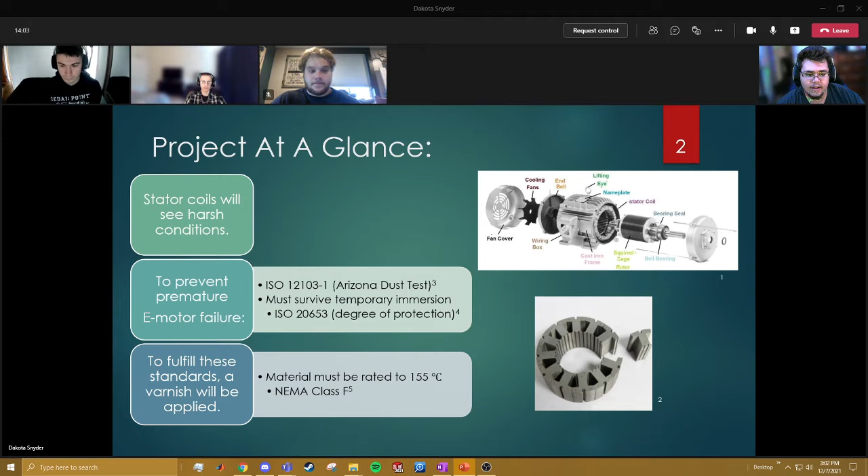to survive temporary immersion. To combat the resulting corrosion because of immersion, a varnish is applied to protect the inner diameter of the coil. This coating will also need to be able to withstand a temperature of 155 degrees Celsius. This project is a two-part project. First, we will need to assess different varnishes and test them for evaluation against specified standards.

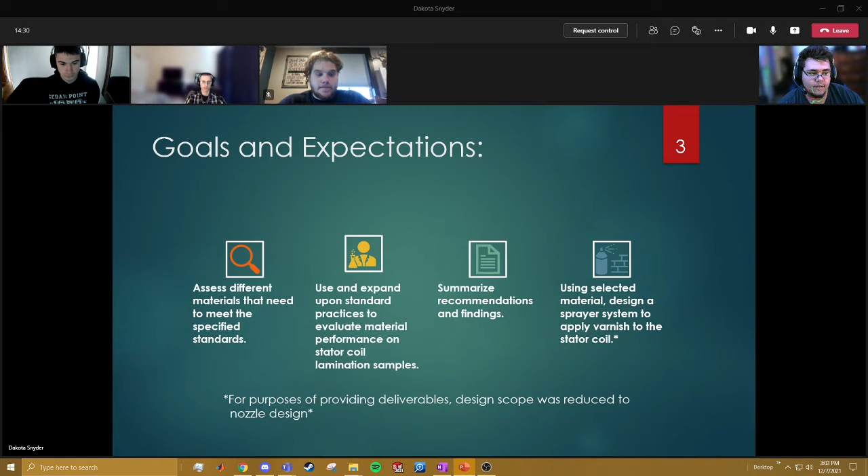After material testing and selection is complete, the team will move into a design phase. The second phase was intended to be used to design an entire manufacturing process to apply the varnish, but due to constraints on the project, the team decided to try and improve the nozzle design to better apply the varnish material.

The team chose 5 materials to analyze. MG Chemicals is the industry standard, but it is a brush-on application. 2 aerosol applied insulating varnishes comparable to MG Chemicals were selected: Seymour Tool Crib and Sprayon EL609. Anti-seize, an insulating varnish with an operating temp outside of the required temperature, was selected to see the effects. A silicone coating, which is not generally used for this application, but has extreme insulating properties, was selected to prove the efficacy of insulating varnishes.

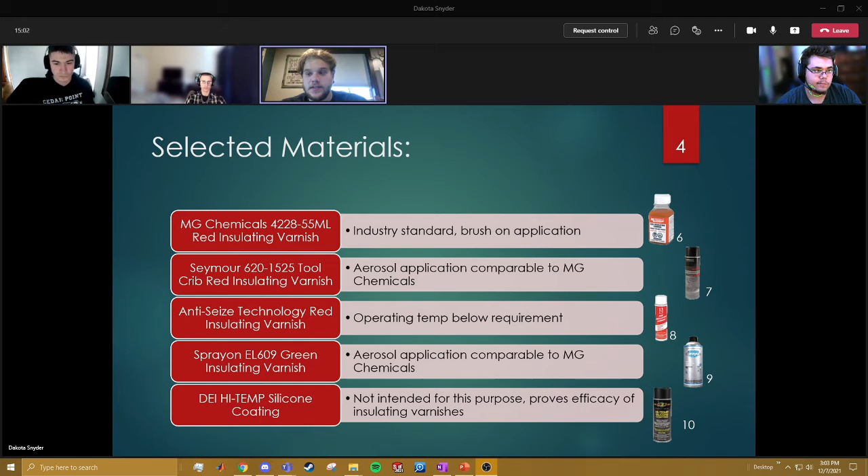The team sprayed e-steel coupon samples with each material. These samples were temporarily submerged in a 5% by weight saltwater solution, then baked at 140 C for 40 cycles at 10 minutes apiece. This saltwater test advances the rate of corrosion and allowed the team to analyze each coating's prevention capabilities. The knife test is an industry standard used to analyze coating adhesion performance. A knife cuts an X into the coating, and then the coating is pried upward using a known force. Strong adhesion is an indication of good coating performance and will help prevent corrosion.

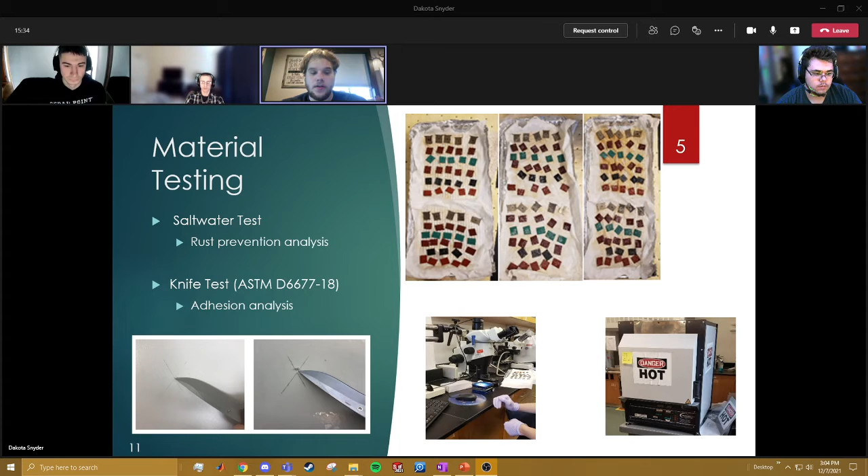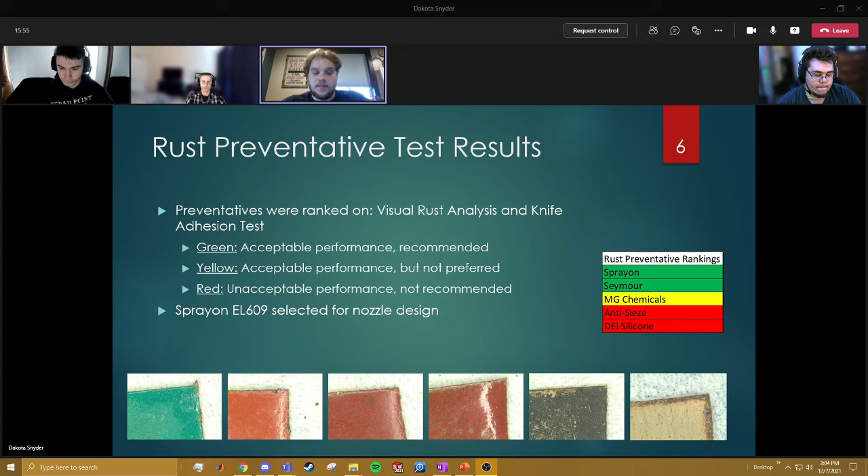The materials were ranked based on the results from a visual rust analysis under a stereoscope and the knife adhesion test. Sprayon and Seymour were the most resilient during the knife test and displayed the best relative rust prevention as well as coating uniformity. Anti-seize and DEI silicone performed the worst in both analyses, which was expected. The team decided to move forward with the Sprayon into the nozzle design.

The number one goal of designing nozzles was to produce an optimized uniform coating that would better suit Schaeffler's needs for the saltwater test. The nozzles were designed in 3 iterations based on fundamental fluid mechanic concepts such as Bernoulli's equation, the continuity equation, and one-dimensional incompressible flow.

Each iteration began with CAD designs of various exit hole sizes and shapes with the intention of forming different spray patterns. From there, the models were 3D printed using a Form 2 SLA 3D printer on campus. Afterwards, each nozzle was tested for the spray pattern. Observations of the test guided research for correcting designs in future iterations. For example, it took until iteration 2 to produce properly working cone patterns and iteration 3 for flat fan patterns.

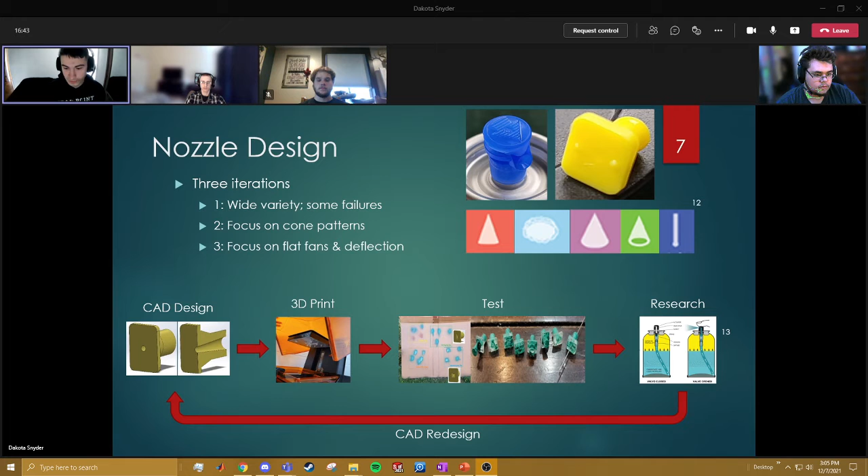3 types of tests were conducted in a controlled lab. An application test was done for 16 nozzles. This test checked for clogging and the ability to reproduce the same spray pattern. Coating thickness was also recorded for posterity and legitimacy, and the saltwater test was repeated for comparison of SD1 samples and verification purposes. The team also decided to bake a second set of samples to see if heat prior to the corrosion experimentation would assist with coating uniformity.

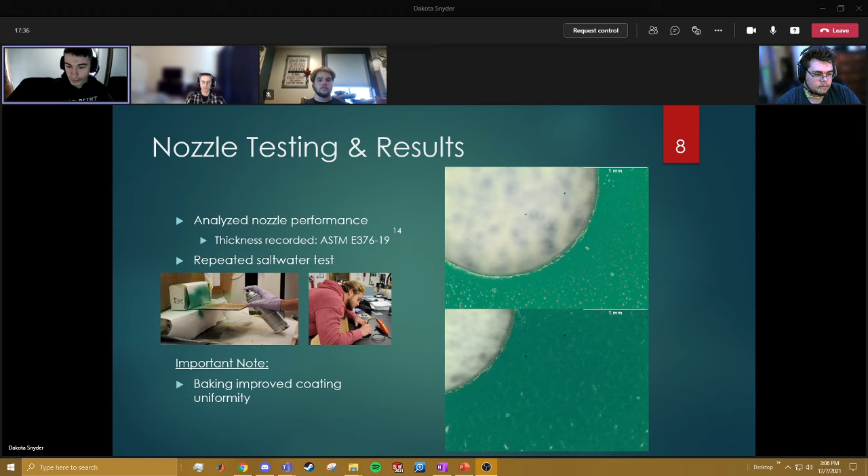These samples were not saltwater tested. The samples were baked for 2 hours at 140 degrees Celsius, which is the operating temperature spec from Schaeffler. Nearly every sample in this set displayed significant improvement in coating uniformity and coverage area. Here's an example. Due to pitting being universal in almost every sample, it was used as a metric for nozzle performance. If you look at the picture to the right, it is a before and after image of the baking process. Nozzles were ranked based on application quality and coating uniformity.

Application quality represents the viability of spraying the samples using each nozzle: clogging, non-optimized spray distance, and inability to reproduce consistent spray patterns. Coating uniformity was checked across all samples and compiled. The samples were checked post-baking and post-saltwater testing. Corrosion performance was also assessed after testing and recorded for posterity and legitimacy.